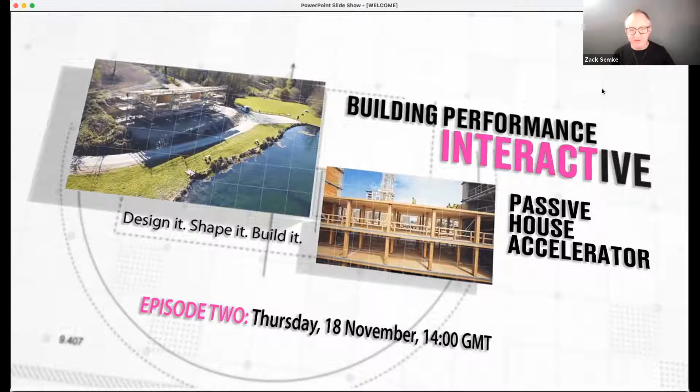So welcome to episode 2 of the Building Performance Interactive. We're really excited to have you all here. We are going to be joined by Lawrence Taylor from KTF Timber Frame, and we're going to be talking about offsite timber frame construction from start to finish.

So Keenan Timber Frame's process is very much a 4-stage process, first of which is the quotation stage. Then we go into design and engineering, then into manufacture, and then finally onto the delivery of the kit to site and assembly. The quotation. The customer has an initial meeting with us. We go through their plans and discuss the project in more detail. Our estimating department then compiles a detailed quotation for their project. It is at this stage where we focus on what is important to the client to ensure the smallest details have been considered.

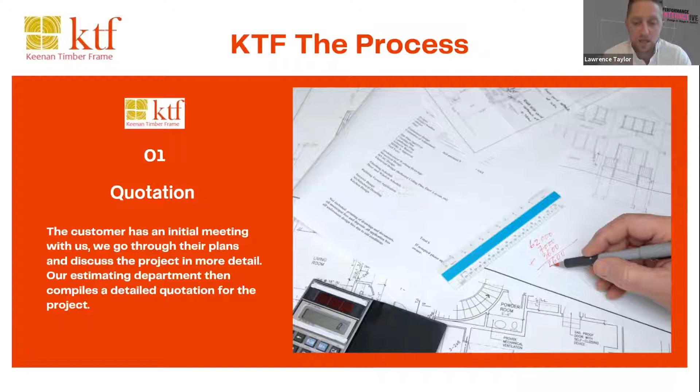The design. When the quote has been approved by the customer, the design team take the drawings and adapt them to suit our timber frame structure. Once this has been done, we issue a base plan drawing along with the point and line load calculations, which allows the client to progress their project to DPC level. It is at this stage we carry out a site survey to ensure the substructure is within tolerance to accept the timber frame. We then progress with the full design, ready for the next stage in the process.

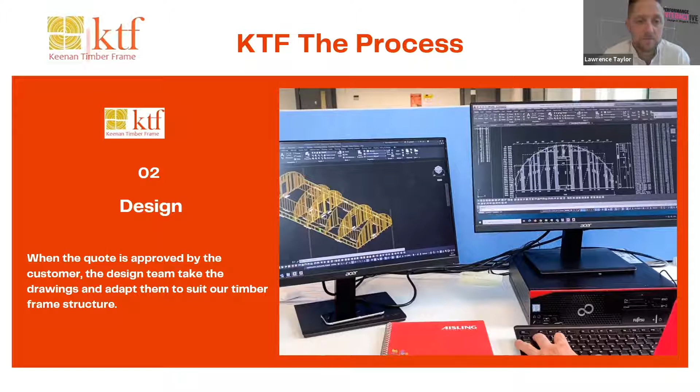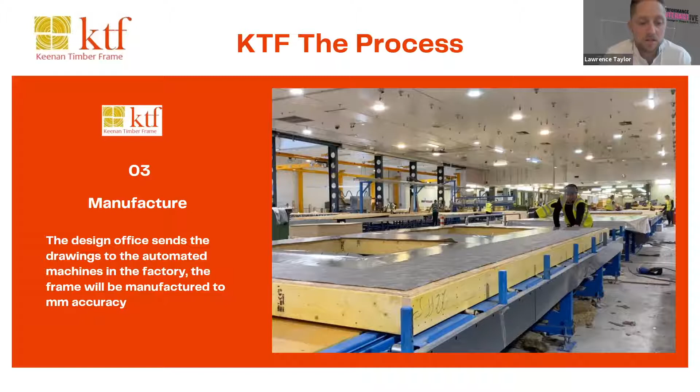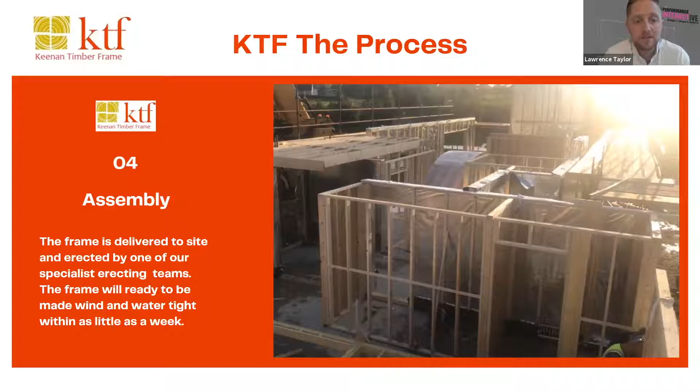Manufacture. The design office sends the drawings to the automated machines in the factory. The frame will be manufactured to millimetre accuracy. We will show you a little bit more about the manufacturing process a little later in the presentation. The assembly. The frame is delivered to site and erected by one of our specialist erection teams. The frame will be ready to be made wind and watertight within as little as a week. Next up, we have a short video which is presented by John Keenan, talking through the manufacture and erection process in a bit more detail.

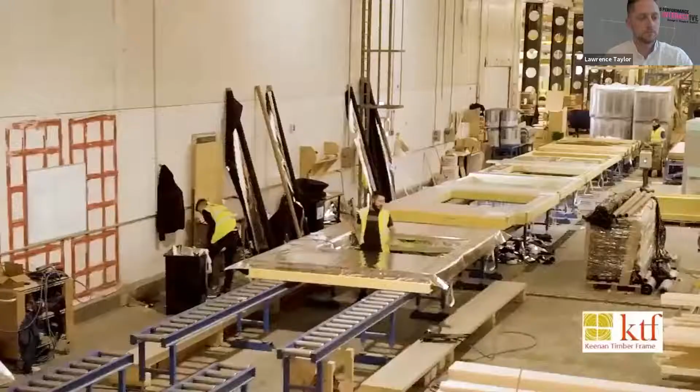Hi everybody, my name is John Keenan from Keenan Timber Frame. We are based in Dundalk, County Louth in the Republic of Ireland. We have been manufacturing and delivering homes since 1999 and we were the first company in the Republic of Ireland to factory fit insulation and airtight membrane to all our panels. At the first stage of our process, we receive your drawings from your architect or engineer, and we adapt the design to a timber frame home.

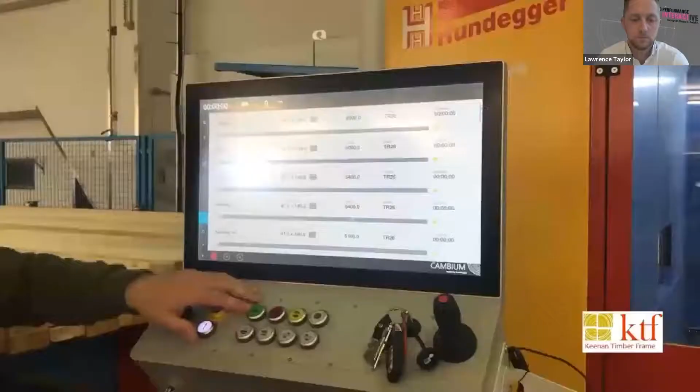Once the designs have been agreed and engineered, we send them to our automated saws and lines. Our automated saw works within 1 millimetre of tolerance.

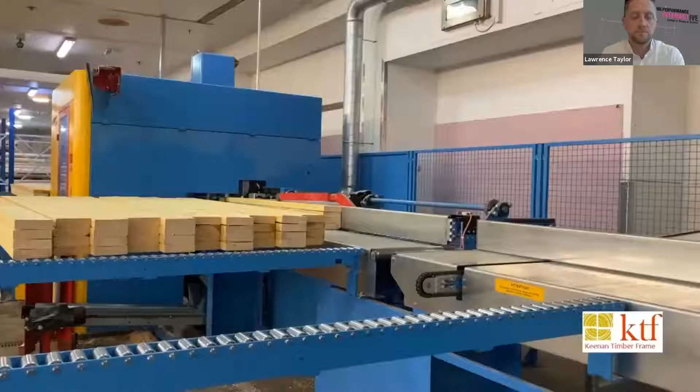The timber we use comes from sustainable European forests. All our timber importers are either FSC or PEFC certified.

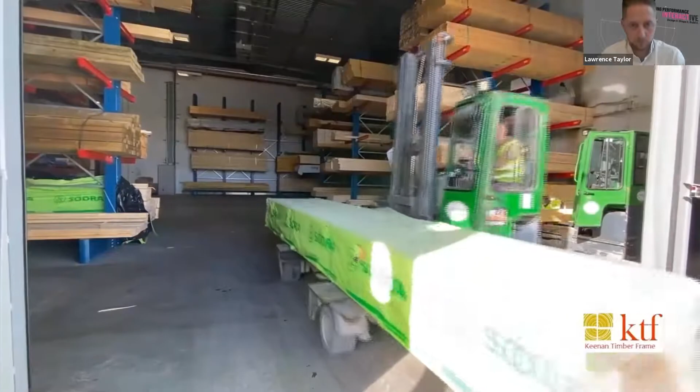Our software breaks down each home into floor panels and wall panels. Each component is numbered and clearly labelled so it can be traced through the manufacturing process.

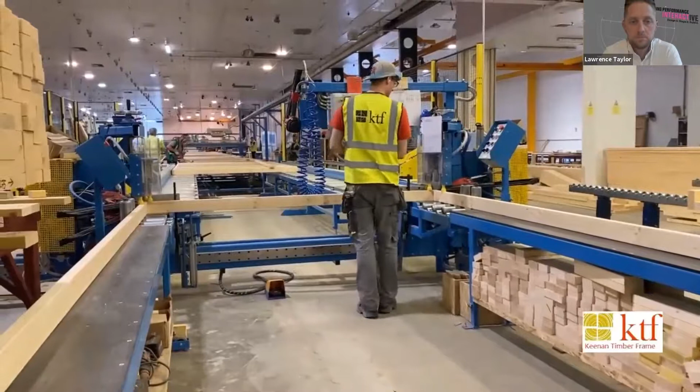The next part of our process starts at the framing station, where each wall is automatically made by our automated line.

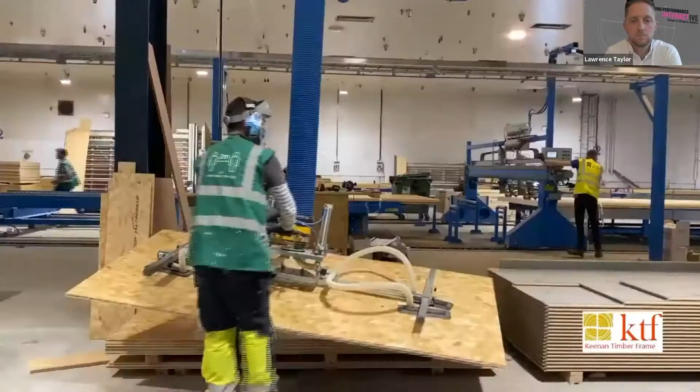We then move on to the next part of our process, where we fix OSB to the external face of the walls with our automated nailing bridge. It will fix the OSB using predetermined patterns specified by the engineer.

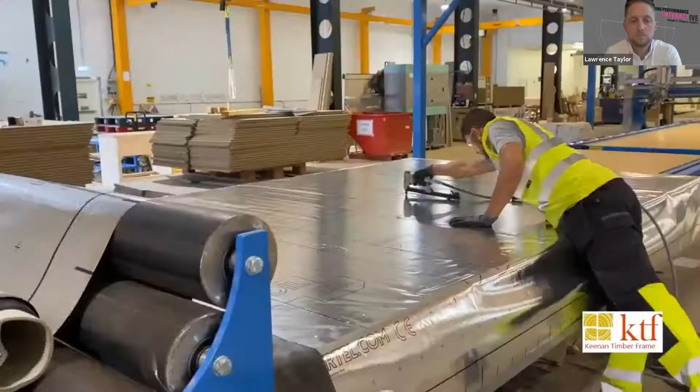The next part of the process, we attach the external breather membrane. We use EcoFoil EXO from Partel. Apart from the obvious performance of the material, we especially love the workability and the robustness of this product.

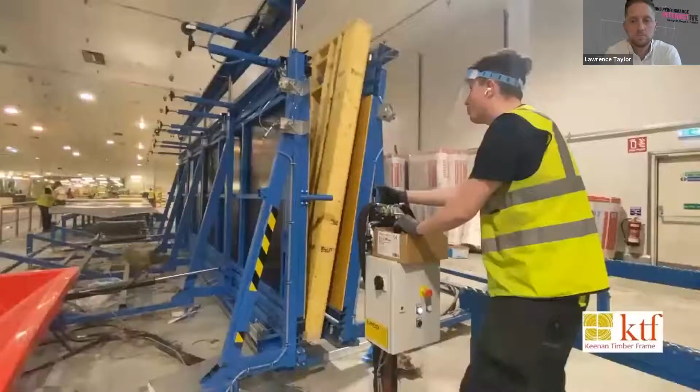Because the wall at this point is the wrong way up, we use our butterfly tables to safely turn the walls over and allow us to fit our external quilt insulation.

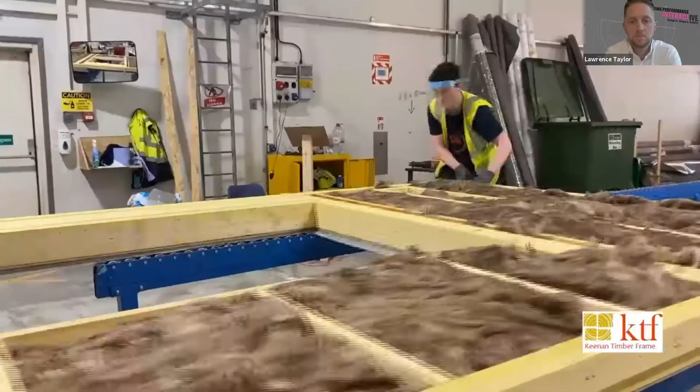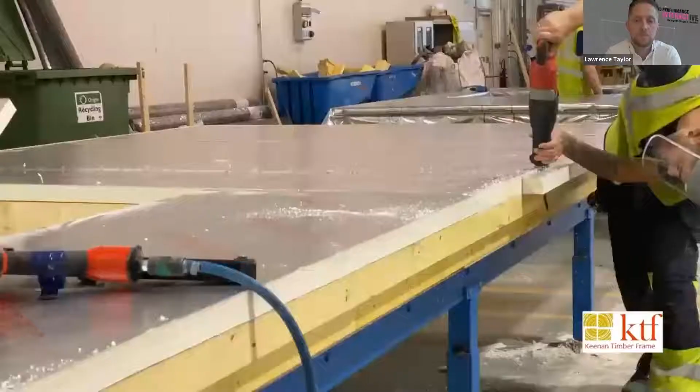We then fit a 50mm rigid PIR insulation to the inside face of the external wall, giving us a combined U value of 0.14. We then fit our airtight membrane.

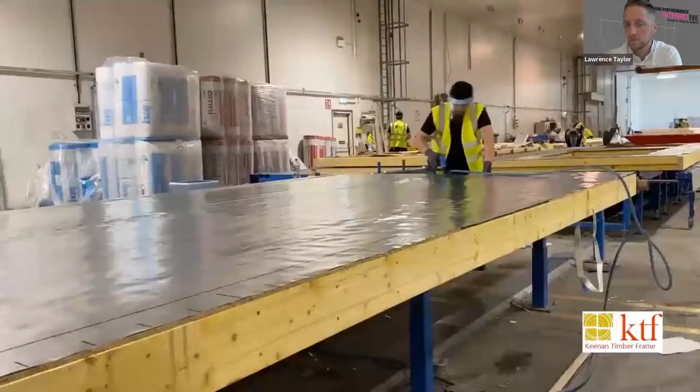We use EcoFoil EZO from Partel. All reveals and openings on the panels are taped in the factory to ensure ultimate airtightness.

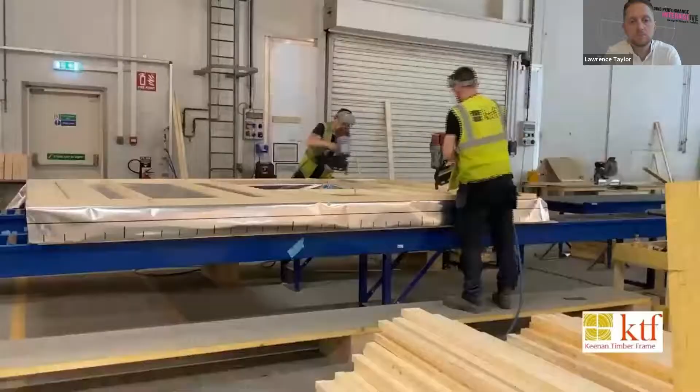We then fit a 35 by 50mm service batten to the wall panels. This allows all services on the walls and protects the airtight barrier behind it.

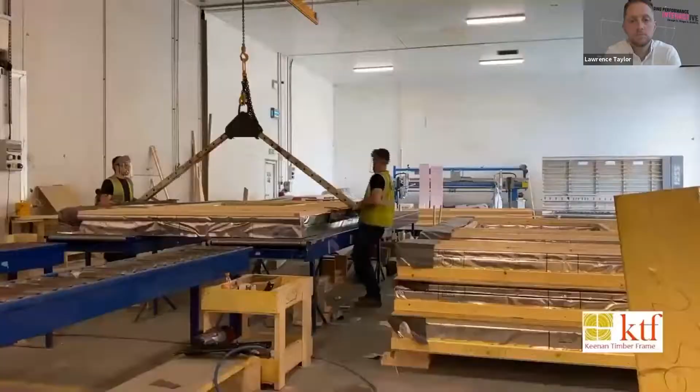All the wall panels are then stacked carefully. Each batch is loaded on the trailer in sequence. Last on is the first wall panels needed in the on-site erection sequence.

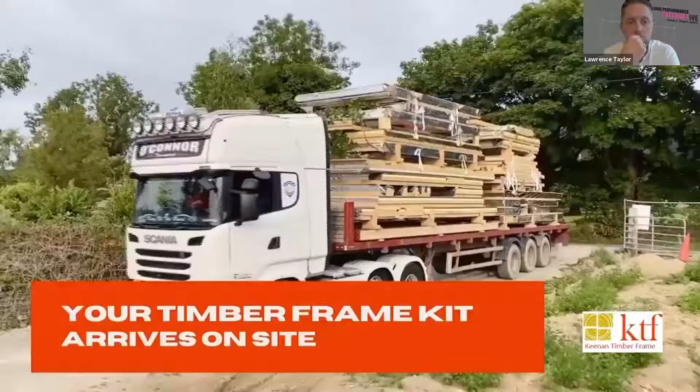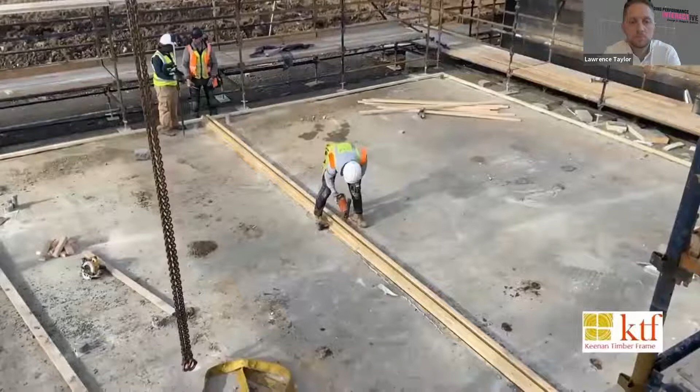The kit arrives on the job site. We then fix our sole plates in accordance with the engineer's requirements, making sure all DPCs are attached properly.

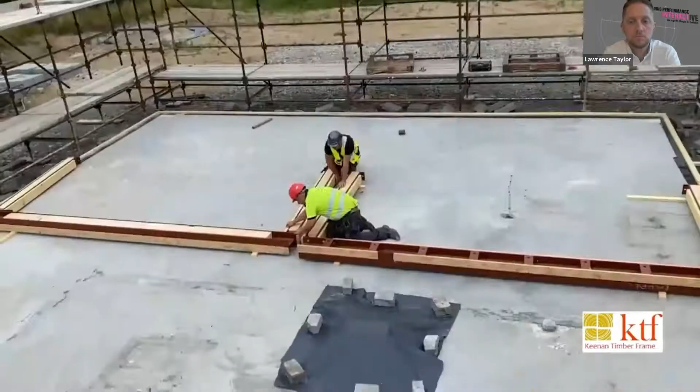Our on-site erecting team then checks all dimensions and diagonals to make sure the base is in accordance with the base drawing. Any structural steels are fixed in place to hold them plumb while the kit is lifted into position.

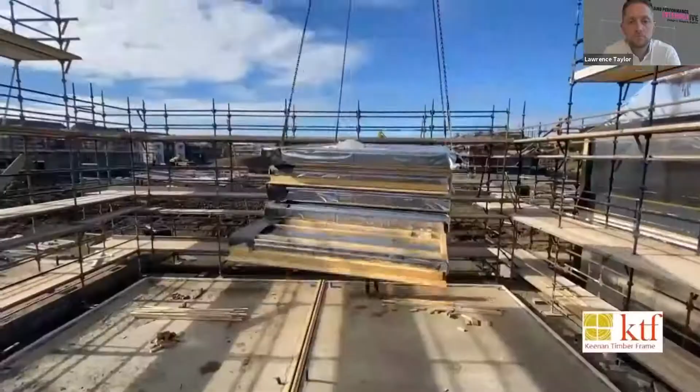The panels are then craned as per their batches into position on the base. All of the wall panels are then craned into position as per the erection sequence and drawings.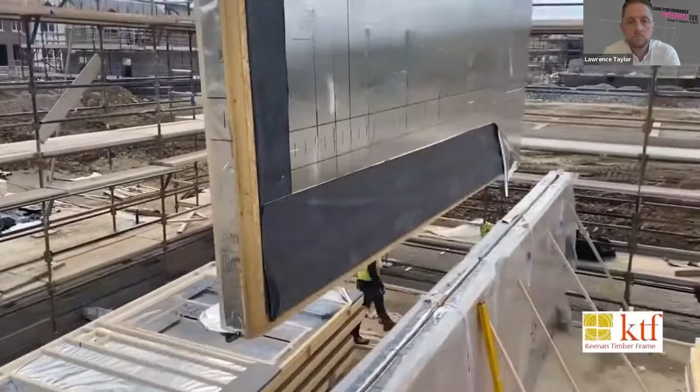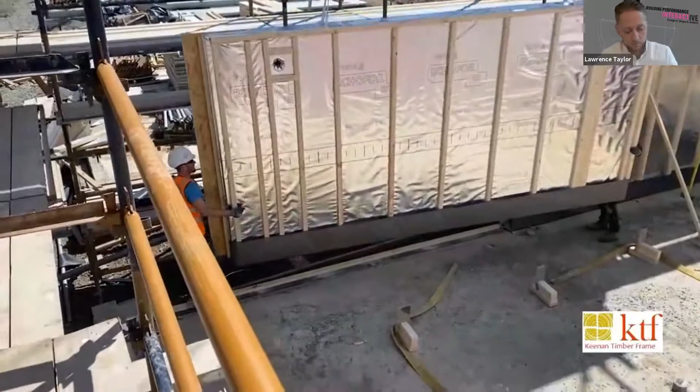As the external lift of walls happens and are fitted, we then fit all of our internal walls.

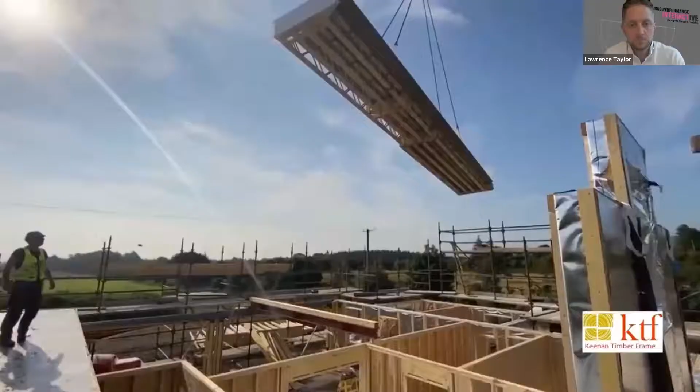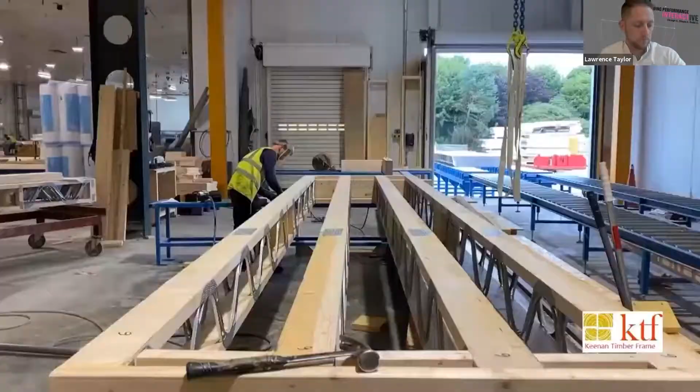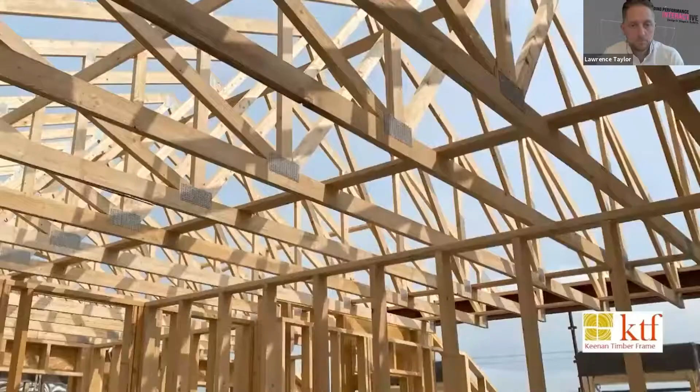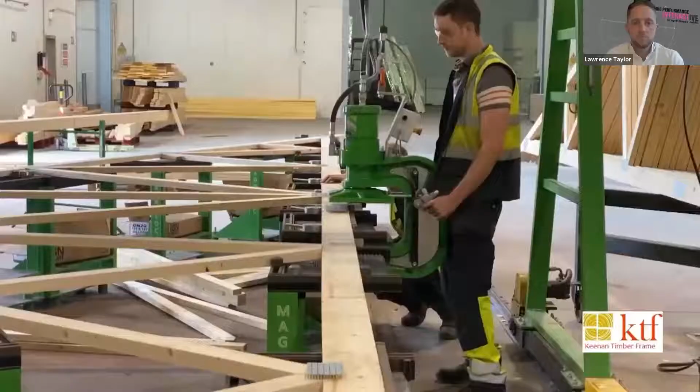All our trusses and spandrels are made in the factory. We can custom make any roof truss or spandrel unit as per the client's design. KTF also have a suite of fire testing done on our walls, floors and trusses.

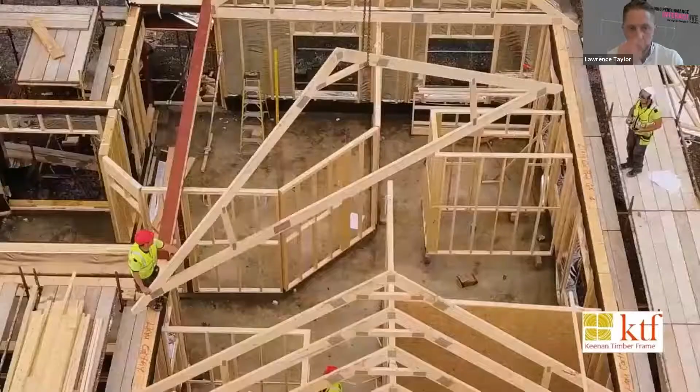Here are some of our recent projects.

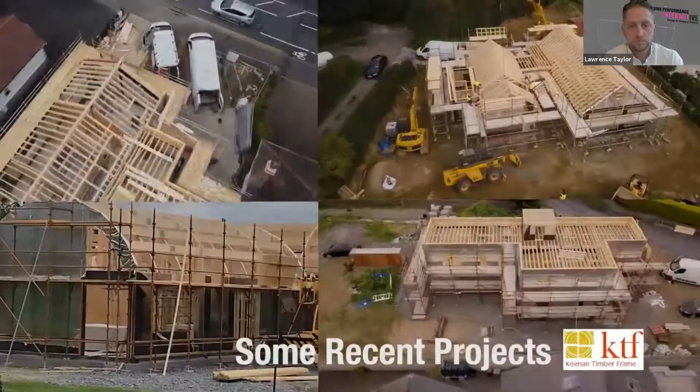So the next stage in the presentation is showing the benefits of timber frame. Timber frame is a fast and efficient offsite form of construction. Using timber frame will reduce construction time by approximately 30%, something that on a self-build project might not have as much of a cost benefit as you would see on a development project where you potentially have 10, 15 or 20 units.

When you take into consideration the reduced prelims costs, it can have quite a dramatic effect on the overall financial implication. It can be constructed at a lower cost due to the fact that a timber frame is a lightweight structure with high load-bearing capacity.

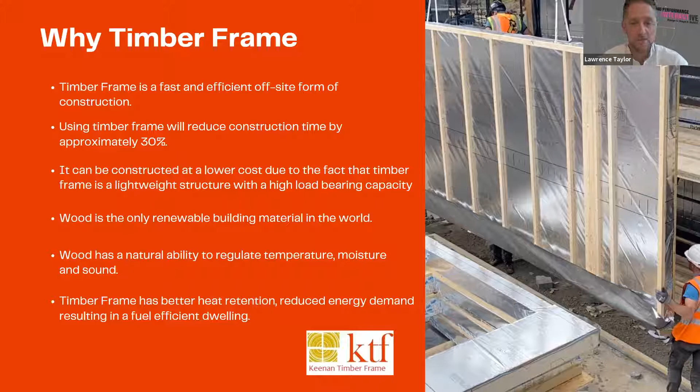Wood is the only renewable building material in the world. Wood has a natural ability to regulate temperature, moisture and sound. Timber frame has better heat retention, reduced energy demand, resulting in a fuel-efficient dwelling.

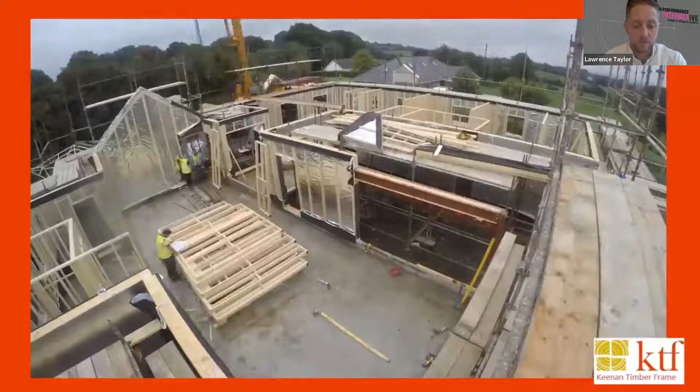What we have here is a short time-lapse video of a project that's been recently done in Ireland. The house itself is 2,337 square feet. It's a bungalow and it has 3 bedrooms. From start to finish, the erection process took just over 5 days.

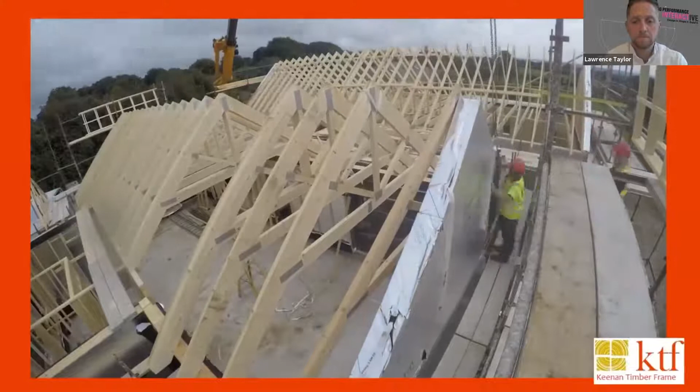Some of the key features of timber frame, again, is the NZEB, nearly zero energy buildings. Any building completed after the 31st of December 2020 must achieve the NZEB standard. These are changes to the ventilation and energy efficiency requirements of new and existing houses.

At KTF, we understand air tightness, continuous insulation, thermal bridging, and controlled ventilation. We know it is not just the energy efficiency of a building or low energy buildings that should be considered. It is equally important to provide quality, comfortable, healthy buildings for our customers.

Thermal bridging, or cold bridging, occurs when there is a break in or penetration of the building envelope, resulting in a difference of temperature.

For a home to be energy efficient, it must be well insulated and as airtight as possible. I always use the analogy of a really nice warm jacket - you wouldn't have a nice warm jacket and then leave the zip open. It's a simple analogy, but it seems to come across well. Because a KTF timber frame home has an excellent standard of insulation, it can dramatically reduce thermal bridging through the superior thermal envelope and also improve air tightness in the building.

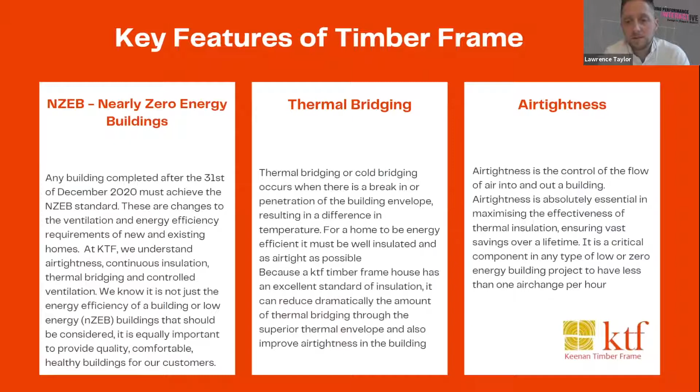Air tightness is the control of the flow of air into and out of a building. It is absolutely essential in maximising the effectiveness of thermal insulation, ensuring vast savings over a lifetime. It's a critical component in any low or zero energy building project to have less than 1 air change per hour.

Building energy rating is an indicator of the energy performance of a building. All new homes require a BER rating. KTF uses high quality efficient insulation products which help us achieve an A3 building energy rating for all our homes.

Carbon footprint: wood is effectively a carbon neutral material, even allowing for transport. All timber used in a KTF house is from sustainable sources. A timber frame house has the lowest CO2 cost of any commercially available building material. For every cubic metre of wood used instead of other building materials, 0.8 tonnes of CO2 emissions are avoided.

Passive house homes and buildings offer superior indoor comfort due to consistent temperatures and good air quality. They also have the added benefit of reducing both external and internal noise due to the high levels of insulation. A KTF timber frame home is an excellent solution for a passive house.

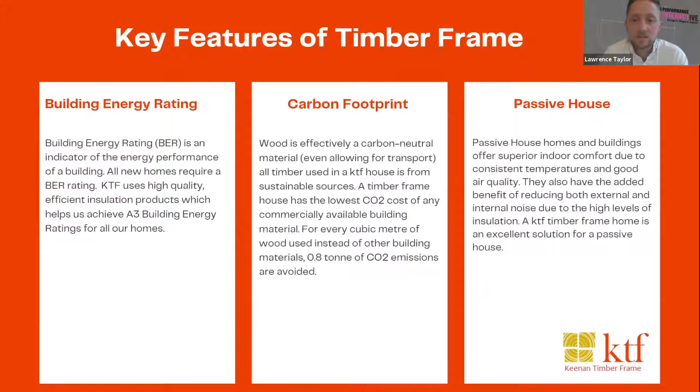Here's a little more detail about our panel system. We class it as a future frame closed panel system - it's our most popular system. Panels come to site pre-insulated with mineral wool in the stud cavity, a 50 millimetre PIR sheet insulation, internal airtight membrane factory fitted, and completed with a 35 mm service batten. This system has a U value of 0.14. The superior thermal envelope ensures fantastic thermal performance and airtightness.

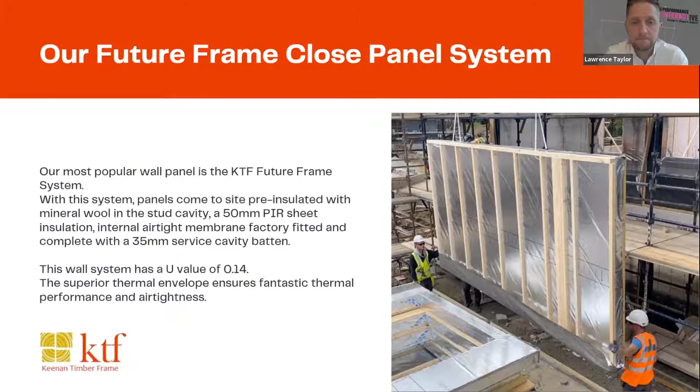We now have a short CGI, so I'll pause it a couple of times to illustrate what all the different sections are. All the timber frame is assembled using 140 by 38 CLS timber.

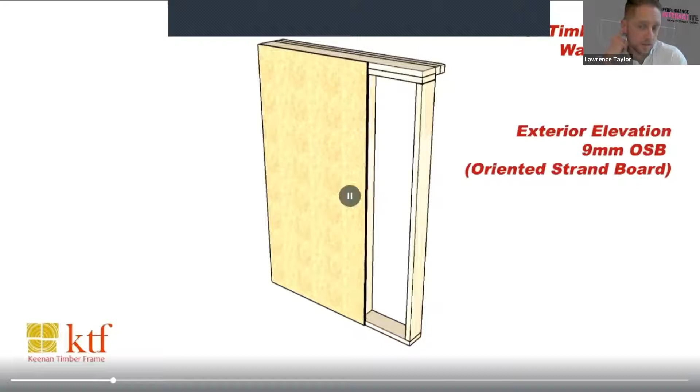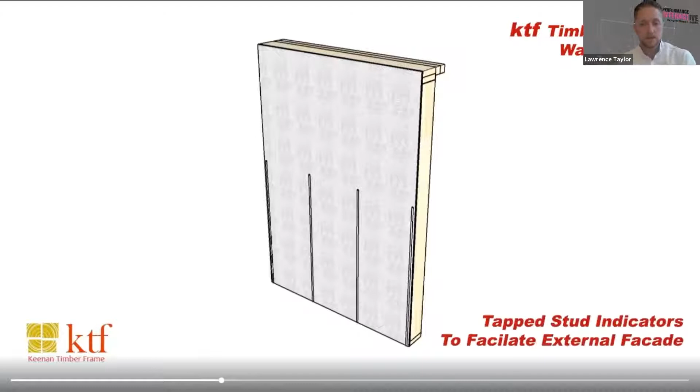On the external face of the timber frame, we've got a 9 mm oriented strand board, followed by the Partel EXO external foil membrane. We then have a tapped stud indicator, which is there to assist with external cladding.

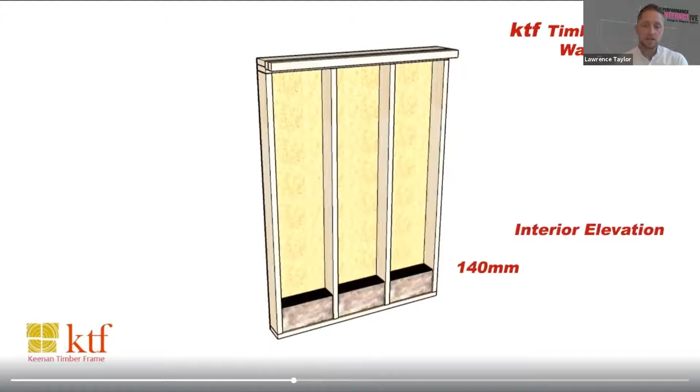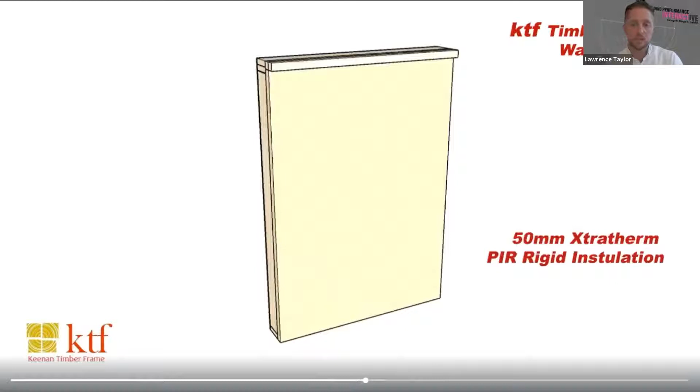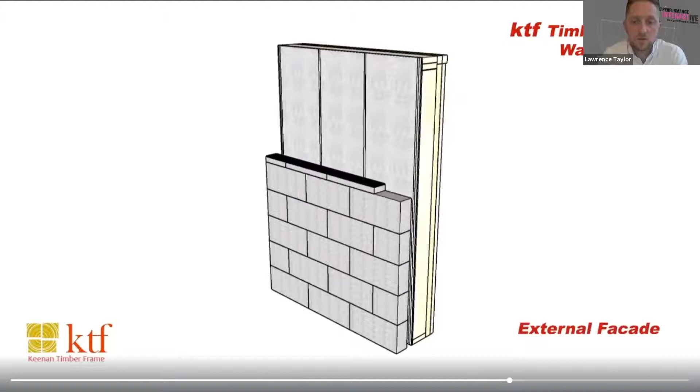Internally, we fill the cavity with 140 mm mineral wool, and as mentioned, a 50 mm PIR board on the inside face to prevent any cold bridging. This is then covered with an airtight membrane from Partel and finished with a 35 mm service batten. This then allows for any external facade, be it blockwork, brickwork or timber cladding, to be fitted.

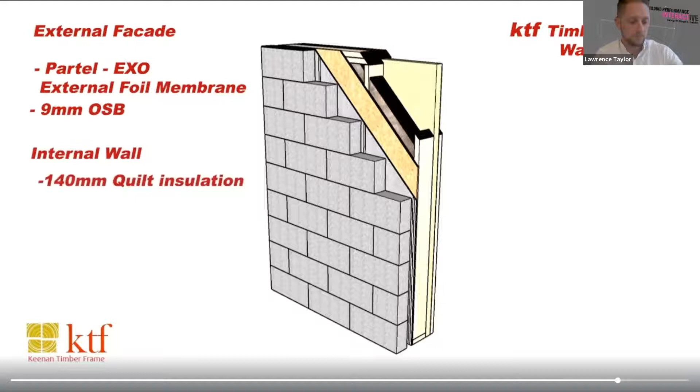And there's just a brief section showing all the different elements of the build.

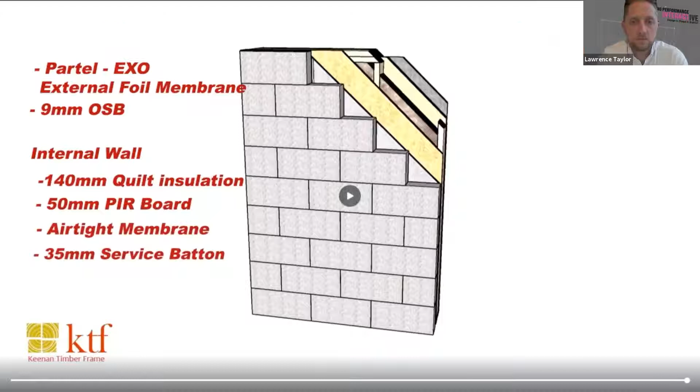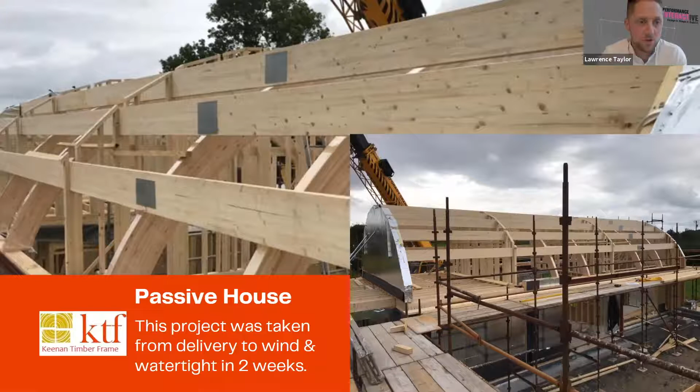Now what we have here is an example of a passive house that we've recently completed. As you can see, it's quite a tricky design, having the curved glulam sections - as a joiner, I would have loved to have been on site and involved with that, to be honest. It took 2 weeks from start to finish to go from slab to being ready for wind and watertight. It's a 2,197 square foot property with 5 bedrooms.

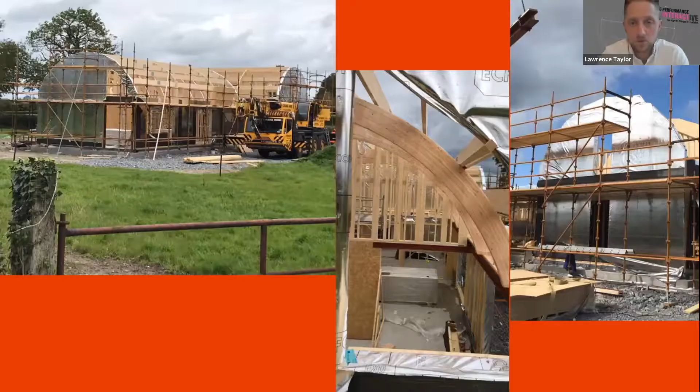There's just some more images of that one - a really nice project and one that we were extremely happy to be involved with.

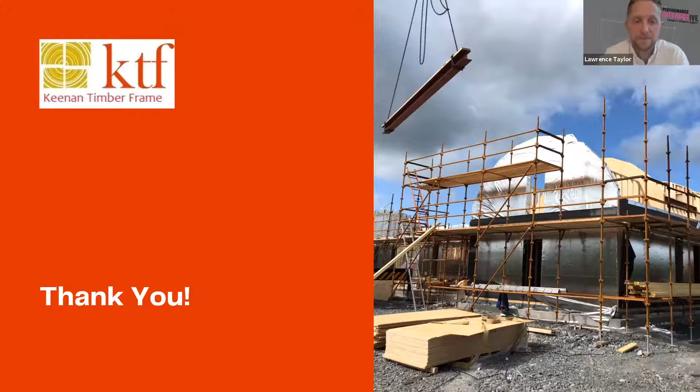It's really great to see a company so committed to timber and best practice timber construction. We're at a time of change in the industry, with a move towards offsite to address the housing crisis here in the UK. Timber only represents a relatively small percentage of output at the moment, somewhere around 20%. I'd be interested in what you think we can do to increase that, given these times it'd be great to see timber enter the mainstream. I don't know what you guys think, Hugh and Ben, but 20% of timber offsite is meager, and it's certainly something we're trying to encourage at Kiss House.

But there's really great commitment from you guys, Lawrence. I think Hugh, what are your thoughts? I think, to be honest, it's probably people's preconceived ideas as to what timber frame is historically. You only have to look as far as places like America and Canada - they've obviously got well on board with it. Their climate and environment is a bit more extreme over there, one extreme to the other. The UK is a little bit more stuck in its ways, used to bricks and mortar. I think with new regulations coming in, it will make timber frame more of an obvious choice. I still think brick and block will always have its place, but timber frame will become more of a key feature.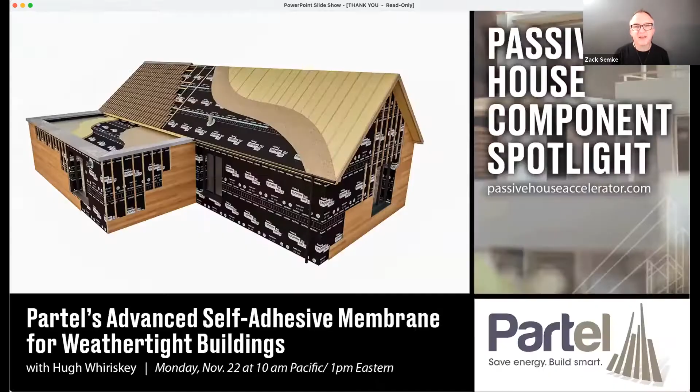I think we were at Florence Shields, if Florence is still here. Yeah, Florence, you're up. Hello. I was just wondering, can you hear me? Yes. I was wondering whether the current situation with COVID and Brexit affects how delivery delays impact your lead-in time for projects.

Well, at the moment, we're happy to announce it hasn't really had an impact currently. We had a project in Sheffield that came across back in August, no problems at all. We had to get a few things in place with commodity codes for the product itself, but other than that it was pretty smooth sailing. The lead-in times with timber did fluctuate quite a bit with lockdowns and COVID, which had quite a big impact. That was felt pretty much across every industry, to be honest. But availability seems to have settled back down now. Costs are coming back down too - certain elements slower than others, but they're returning to roughly where they were pre-COVID.